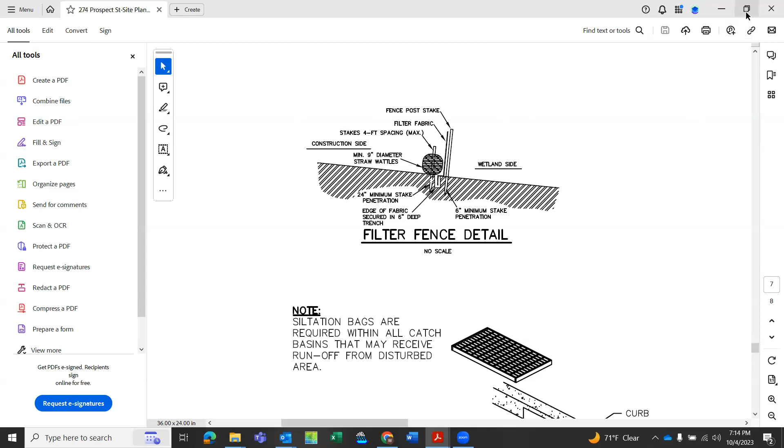Yeah, this property has had a number of proposals over probably the last 20 years or so. I know a couple of different landowners have cleared the property over the years. Some of them had maintained it as more of a field, so there aren't really too many mature trees on the property. It's more overgrowth and brush and so forth.

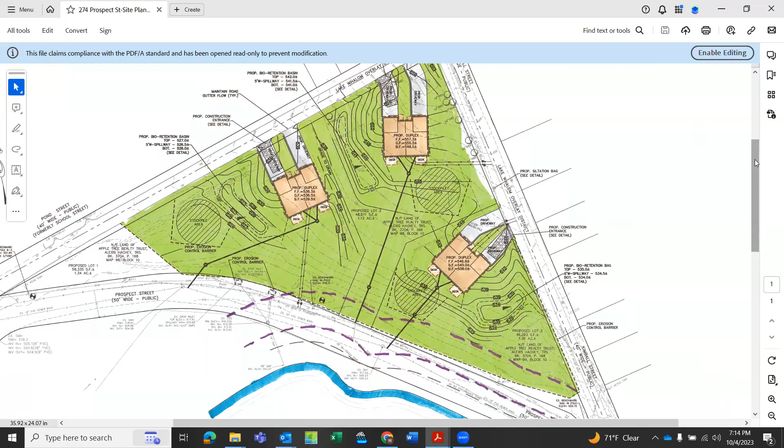And I did notice that there was a lot of Japanese knotweed, and I'm curious, certainly not part of the Wetland Protection Act, but is there a plan for that?

So we had this property looked at before for wetlands, in a couple of different iterations of projects we looked at doing on this property. We actually had an order of conditions issued by the previous Conservation Commission years ago in one of those iterations, and there were no wetlands on the property. I know that was a question even the planning board had, to make sure we were going in front of you to confirm nothing was on the property. That was something Anthony Cleves from our office, who did the plans, made sure the planning board knew on Monday when he met with them.

Yeah, that's cool, I don't think anybody's questioning that. At least I'm not, but my question was, I noticed there was a lot of Japanese knotweed on the property, and I was curious if you were going to address that, that's all.

You mean getting rid of all those? Yeah. I think the intent is to get rid of anything on there that's invasive. Because of some of the clearing that's happened before, they don't want some of the growth that's come in. So that's part of why what we're showing on the plan in light green is really what they're looking at as limited disturbance, to get rid of some of the growth that has come in that they don't want to remain on the property.

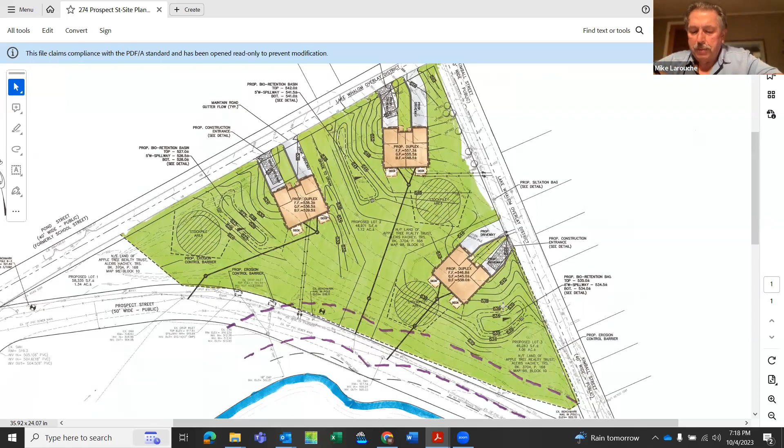Thank you so much. Any other questions from Mike? No, I think that's all I have. Thank you. Any other questions or comments from the commission?

Any questions or comments from members of the public? Okay, I think I'm looking for a motion to approve with a negative determination.

So moved by Jeff. Thank you, Jeff. Second, Mike. And I'm assuming that this is a motion for negative determination with standard order conditions - just to say it out loud.

Roll call vote: Rich Tremblay, aye. Jeff Viviano, aye. Mike LaRouche, aye. And I for myself - that is a negative determination with standard order conditions. Thank you very much.

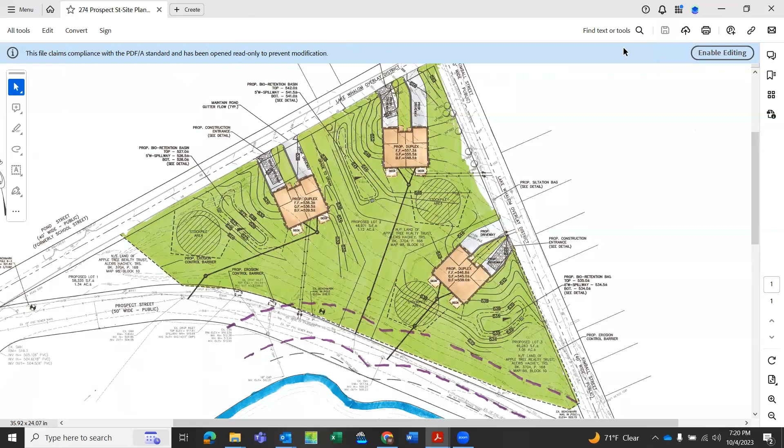Moving along, pursuant to Mass General Law Chapter 131, Section 40 as amended, and the Town of Lunenburg Wetlands Protection and Municipal Bylaws, a public hearing on a request for determination by Karina Veenstra for the placement of a 4x16 rolling dock at 19 Cliffview Terrace.

Do we have Karina or her representative here on the call tonight? I saw Karina on the call. Sorry, yes, I was trying to find the button to speak. I'm present, no issues. I live in Zoom, but I know it's not second nature to everybody.

Are you speaking for yourself, or do you have a representative that's going to speak? No, I'm speaking for myself. Okay, very good. So why don't you review the scope of the work with the commission? I live on Hickory Hills Lake on Cliffview Terrace, and we're looking to place a 4 by 16 rolling dock sticking out into the lake from our shoreline.

That is very kind of the scope of it. I have some photos, but I did not get them sent to our part-time person in time to get them uploaded to the site. Does anybody want to see those photos? I would need to get them uploaded real quickly. I'm happy to share them, it'll just be a pregnant pause.

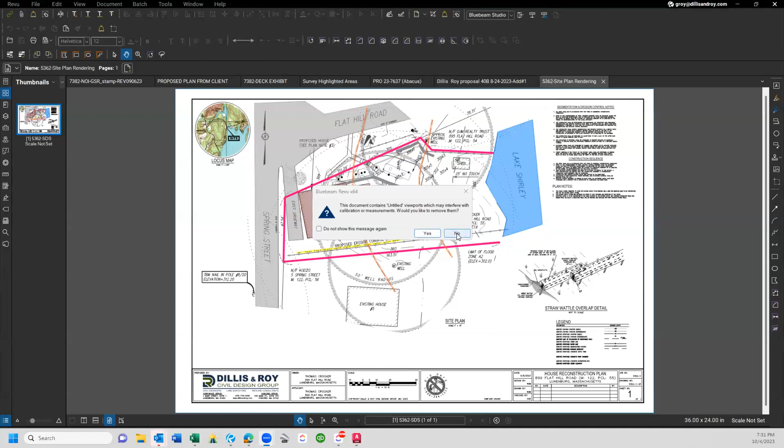As you can see, this is the intersection of Spring Street and Flat Hill Road. There's an existing 2-bedroom home here now that will be coming down, and any foundation walls found inadequate will be removed and replaced with concrete walls matching the existing ones.

There is no other site work being proposed. It's just a removal and replacement of this home, going up a second story. The new construction will rearrange rooms from a very cramped 2-bedroom kitchen and living room on one floor, spreading it out.

We'll put the bedrooms upstairs and expand the kitchen and living room area downstairs. At the bottom right of the screen, there's a straw wattle with overlaps proposed in yellow on the site, and two orange lines: the first is the 50-foot buffer, and the second, through the edge of the house, is the 100-foot buffer.

Other than that, there is no other regrading or anything that will happen—again, just a removal and replacement of what's there with a second story added. If Tom Crocker has any additions, I'll give him the floor if he'd like.

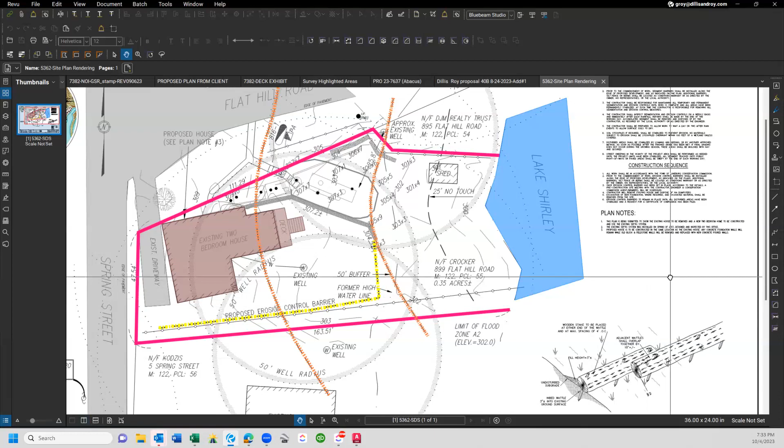Could we see plan note 3?

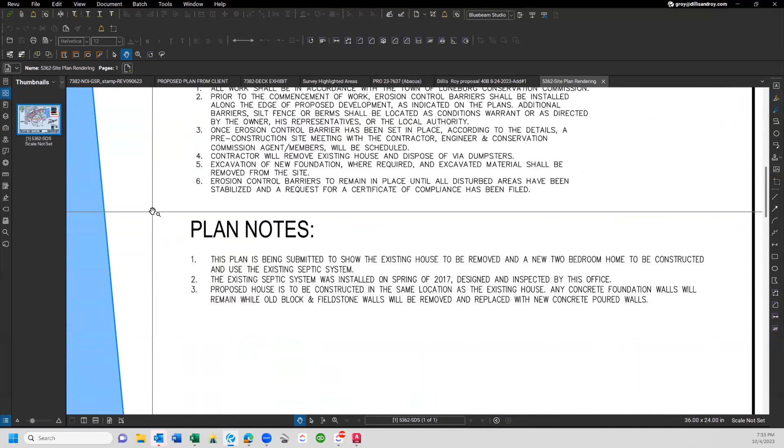I was just looking at the DEP comments, and I don't think they picked up that the footprint's not going to change on this, but the notes are there. I think it's just an artifact of them being rushed to do everything they're asked to do. Other than that one comment, the DEP had no other comments, and the file number is 208-1307 for this project.

I noticed the erosion control detail shows straw wattles with overlapped ends. I would expect to see straw wattles and a silt fence. If that can be part of the approval on your end, I don't think there'd be any issue on our end. Okay, thank you.

I did walk out there—there's a lot happening in a little lot, although it's not as small a lot as many in that area. But yeah, a lot happening, especially with those well keep-outs you have to manage.

I will open the floor to my fellow commissioners to ask questions or make comments. Well, I'm not seeing any comments—we have a quiet commission tonight, which is okay, nothing wrong with that.

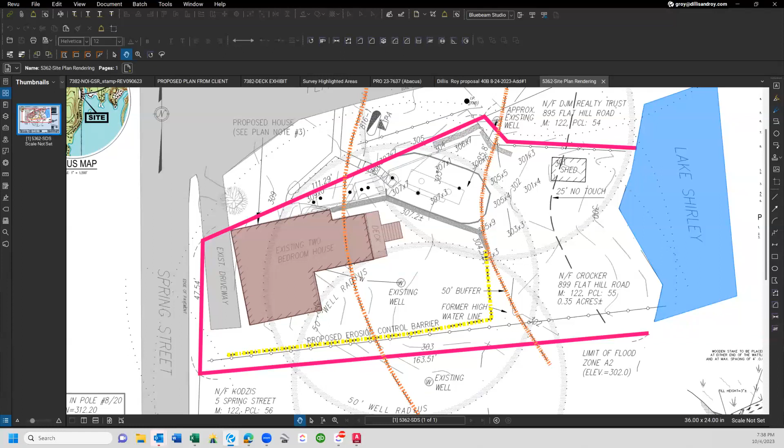Rich Tremblay, I vote aye. Jeff Viviano, aye. Mike LaRouche, aye. And I for myself. Okay, thank you very much. Thank you.

Okay. And for the record, I'm going to acknowledge that Rich Birch has now joined us. So we have the addition of Rich to our conservation ranks. Thank you, Rich.

Okay, we're going to start in on the continued public hearing section of our agenda. Pursuant to Mass General Law, Chapter 131, Section 40 as amended, and the Town of Lunenburg Wetlands Protection and Municipal Bylaws, a public hearing on a notice of intent by Peter and Lily Coronis for the demolition of an existing dwelling and detached garage and construction of a new single-family dwelling, driveway, and septic tank at 38 Oak Ridge Road.

Do we have the residents or their representative on the call? Yeah, Ryan Proctor with Dillis and Roy here. I believe Peter and Lily Coronis are on the call as well.

Okay, very good. Why don't you, Ryan, you've already taken us through the details of your project, but just give us the overview, if you would, show us the plans again, if you can, and then let's address where we left off at the last hearing. Okay, I will begin sharing my screen here.

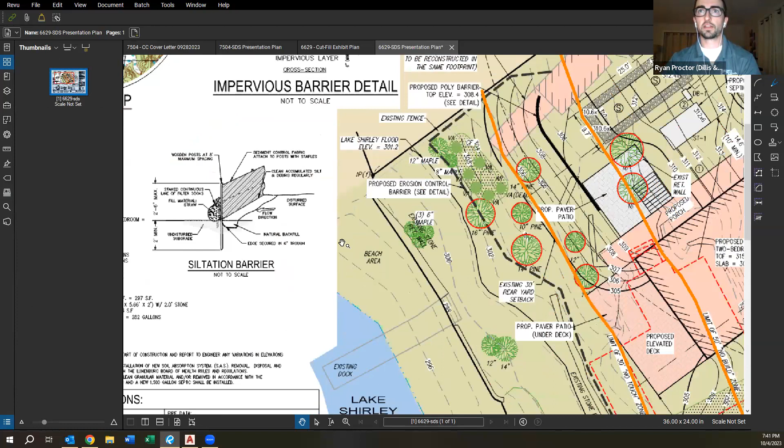So the first comments, these are from the commission members at the opening meeting. It was requested that we include a silt fence in addition to the straw wattle and show that detail on the plan. So I do have the detail included, which has a silt fence and the straw wattle supporting it. And that's indicated by this dark dashed line outside the limit of work.

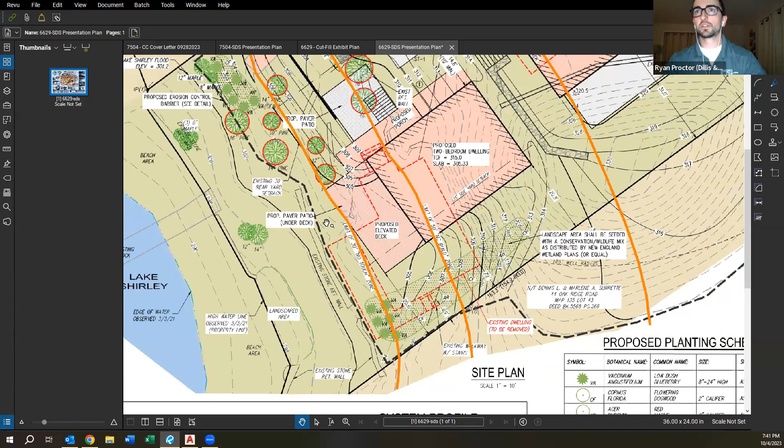It was requested that we clearly delineate the proposed trees that are to be removed, so I had circled those. The plan I submitted was not colored like this, but I did circle in red the proposed trees that are being removed as part of the project.

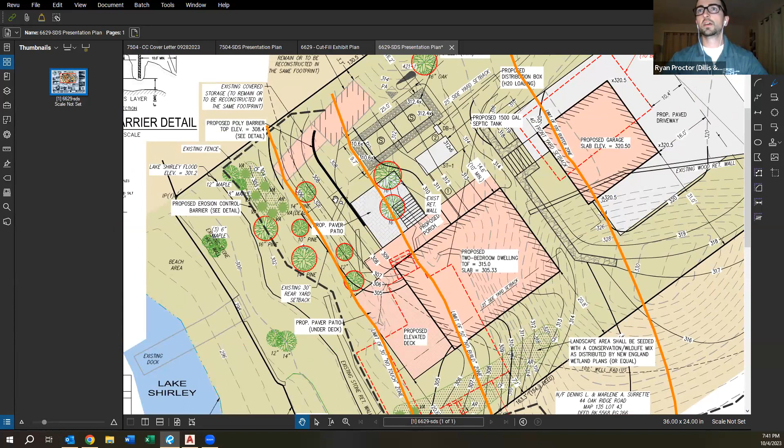One of the major, I'd say the most significant conversation at the previous meeting was relative to mitigation for that tree removal. So I did supply 2 areas and a table of the proposed mitigation. There are 2 areas that we thought would be suitable. One is below the existing sheds, where I'm circling with my cursor now. And then a larger area is in the location of where the existing house, which is going to be removed, within that footprint along this property line here, which is adjacent to the proposed house.

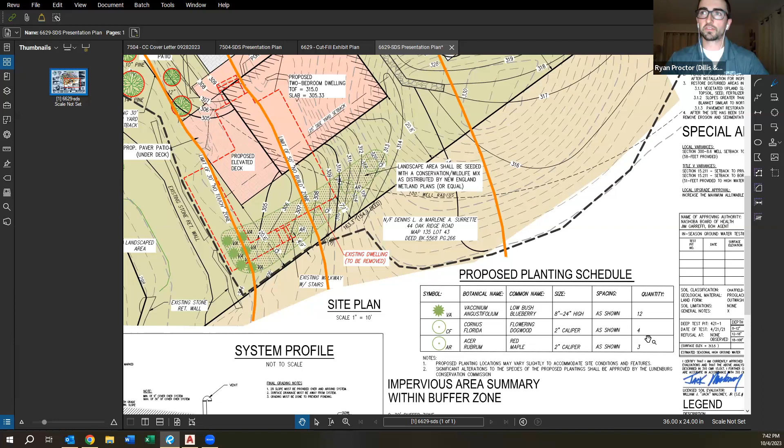So the trees that we're taking are primarily pine trees. So to provide mitigation for those trees, we have a mix of low bush blueberry. And then for shade trees, we have 4 dogwood trees and 3 red maples for those trees. And I did have a schedule here specifying size and the common name.

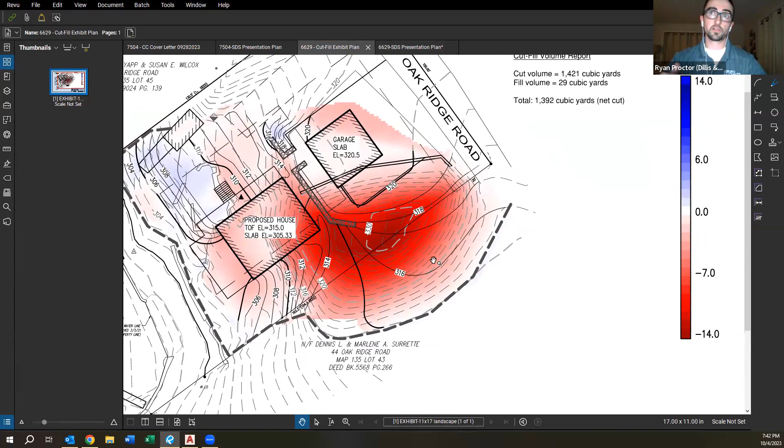The third item that was requested was a grading exhibit, so I did prepare a colored cut and fill plan. The reason for this request, we are proposing to take down a gravel esker that's mostly on our property, and there's some grading on the abutting property as well, which will come up in the next comment. The legend of the plan indicates that the darker red areas are the larger cut volumes. So this is that esker where we're going to be cutting it down to level off the area for the proposed house.

And for the driveway and the garage as well, the rest of the site is pretty mild in terms of cut and fill, indicated by the less intense red and blue colors.

The last item from the commission, requested by Leah at the opening meeting, was that we provide an updated WPA 3 form with the property owner's signature from 44 Oak Ridge Road. We do have a little bit of grading on the property associated with removal of that gravel for this project, so we did submit a revised WPA 3 form with the signature from the abutting property owner. DEP had a similar comment relative to obtaining that signature, so we did submit that, as I just mentioned.

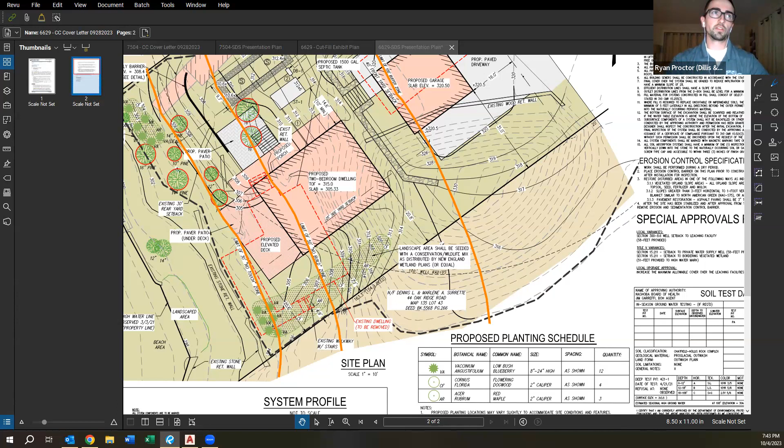Comment 2 was: given the steep slopes and the proximity to wetlands, the commission may want to require additional erosion control measures in stockpile management locations. I think the erosion control was addressed with the addition of the silt fence. For stockpile areas, it's anticipated that we're going to work our way from the bottom of the site out, so I have a note that stockpile materials should be stored outside of the 100-foot buffer zone where possible.

Lastly, from DEP, the commission may want the applicant to demonstrate how work this close to the resource area can be performed while providing protection to the resource area in perpetuity. During construction, we have the erosion control barriers, which will remain in place and be maintained throughout the construction process. We also have landscape mitigation areas for post-construction, and any disturbed areas not landscaped or occupied by new building area will be restored with 4 inches of loam and seed.

So that was it, those were the comments from the last meeting and from DEP. If there are any questions on that or any of the previous stuff I've presented, I'm happy to address those now.

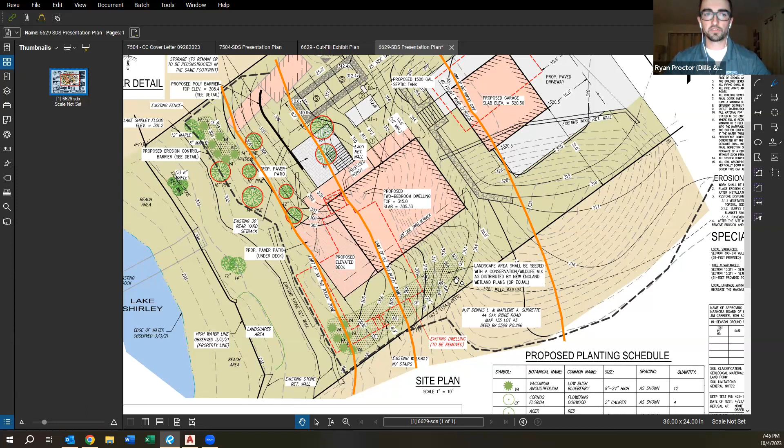Thank you, Ryan. So with regard to the stockpile location, you're not specifying them, but just adding a note that they're to be outside the 100 where possible. Yeah, exactly, it's a pretty small site, there's a lot going on here with the new building and septic. We're definitely not going to store anything within the 30-foot no-touch zone. Anything temporary may occur next to the building, but any large stockpile of material is going to be stockpiled on top of the site where it's flatter.

Okay, so I think what DEP was getting to is that where there are stockpile areas, they would want some additional silt control and protection there. If that's something, Madam Chair, that could be included as a condition of approval if the commission acts favorably, that's something we're willing to do. We're happy to do that.

Okay, and then so I saw your table. The trees that have red around them are the ones being removed, yeah? Yes. Okay, so how many trees are you removing? I believe there's 9 total, one of which is a pine tree that's dead.

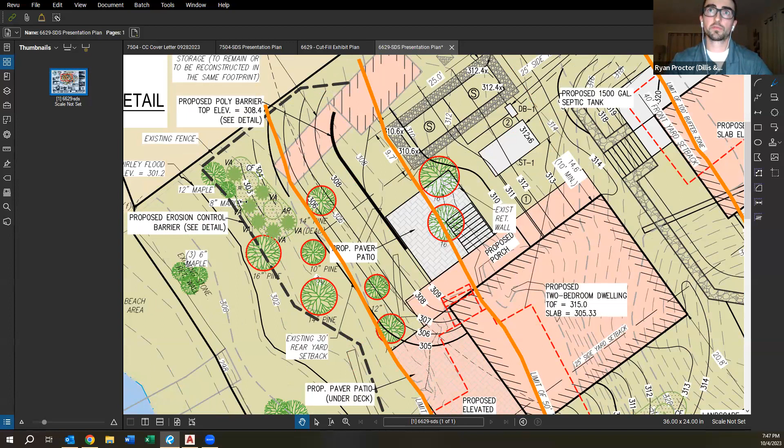And where are the new trees going to go? Yeah, sorry, they blend in a little bit. This is one of the landscape areas here, we have a dogwood and a red maple. And then we have 6 low bush blueberries in this area where there's some existing vegetation. In the location where we're taking out the existing house along the slope, we intend to restore that area with a row of blueberry bushes along the 30-foot, and up the side of the slope and along the property line, a mix of dogwoods and red maple. So they're drawn here in a circle.

So I'll just tell you, speaking for myself as one member of the commission, we do have a mandatory municipal guideline replacement of 2 to 1 for any trees taken out within the 30. I would expect those to be replaced within the 30, because that's where we get the highest level of protection moving forward. When you replace trees outside of the 30, outside of the 50, they're not as protected moving forward for any subsequent work. The intent of these regulations is to ensure, as DEP even says, in perpetuity, the protection of the wetland and the protection of these buffer zone trees. So again, that's me speaking as one member of the commission.

Other than that, I don't have any questions. I think that addressed all of my notes from what your actions were before. So I'll open the floor to other members of the commission.

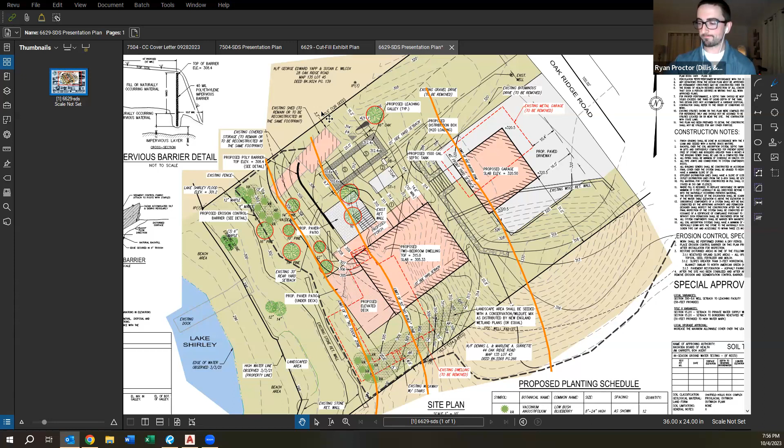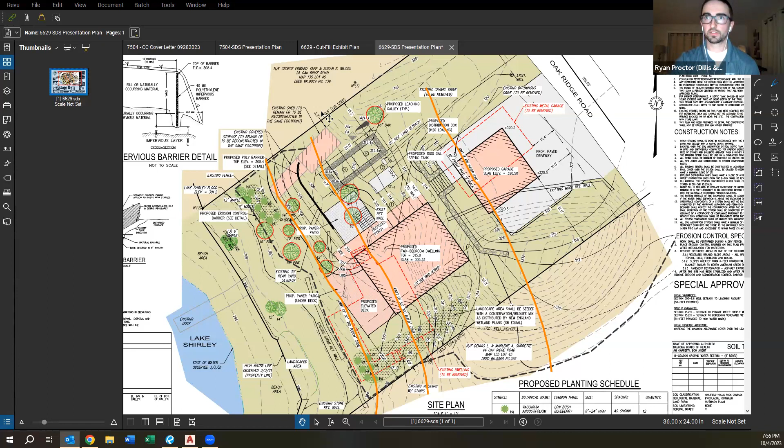So that means we get to ask you when you might like to have this hearing continued to. It sounds like the landscaping is really the only concern at this point, so if you can accommodate us at your next meeting, that'd be appreciated. I'm happy to get you a revised landscaping plan prior to, or sometime next week. That would be excellent, and October 18th is the date of the next meeting.

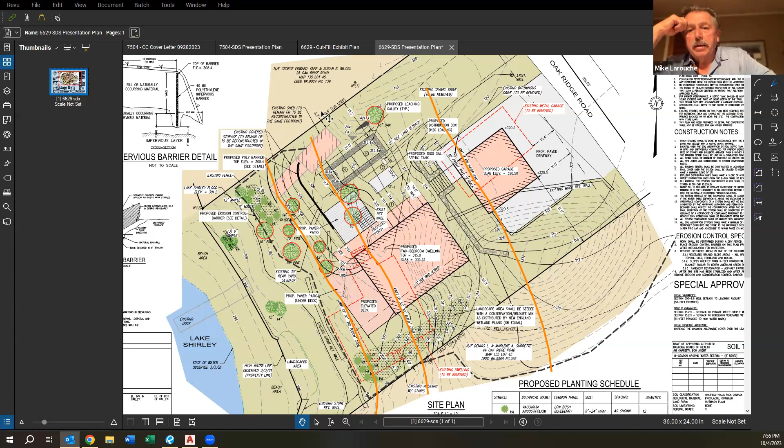I'm looking for a motion to continue this hearing to October 18th. So moved by Jeff, second by Mike. Okay, roll call vote. Rich Tremblay, aye. Rich Birch, aye. Jeff Viviano, aye. Michael Larouche, aye. And I for myself.

Thank you, Ryan. Thank you.

Okay, moving along. Pursuant to Mass General Law, Chapter 131, Section 40 as amended, and the Town of Lunenburg Wetlands Protection and Municipal Bylaws, a public hearing on a notice of intent by Denise Charpentier for the removal of an existing dwelling and construction of a single-family dwelling at 6 Peninsula Drive. Do we have Denise or her representatives here on the call tonight? Yep, Ryan Proctor, Dillis and Roy, once again representing the applicant. Welcome back, Denise Charpentier, and I believe her brother Tom is on this call as well with us, the abutting property owner. So I'll just jump right back in and share my screen for this one.

Excellent, thank you.

All right, so just a quick recap. This project is similar to the last, a tear down of the existing structure on the property and construction of a new single-family dwelling. This is at 6 Peninsula Drive, which is over on Hickory Hills Lake. Similar to the previous hearing, we had continued the opening public hearing. There were a couple of comments again from the commission, and we were waiting for a file number from DEP, which we have received at this point. And that is file number 208-1305.

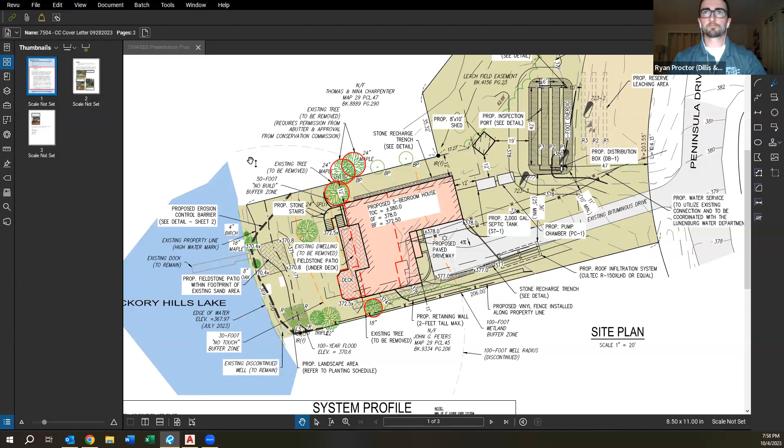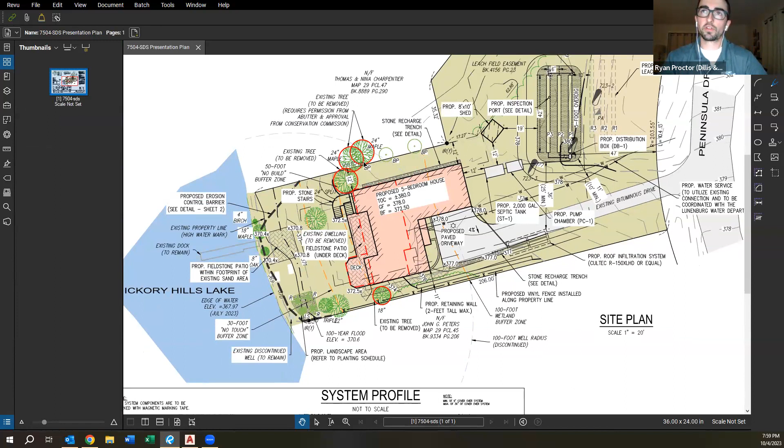So I will just once again go right down with the summary of changes I made to the site plan. Once again, the major topic of conversation at the first hearing was relative to which trees are coming down and any replacement of those. So I've once again circled the trees that are going to be removed in red. There are 4 trees coming down, 2 of which are on the abutting property, and they're all located outside of the 50-foot buffer zone, which is this orange dashed line here. For mitigation to these trees, I again submitted a proposed planting schedule.

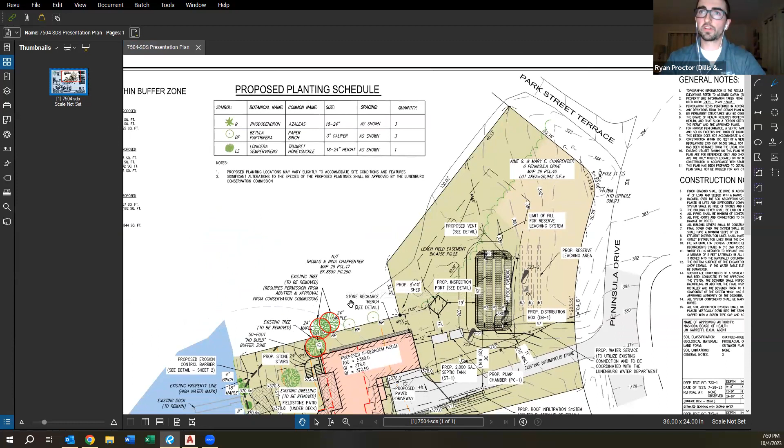For shade trees, we are proposing 3 paper birch trees along the property line, and I do have some pictures of this location I'll show a bit later on. Along the property line between Denise Charpentier and Tom Charpentier to the north, we're proposing 3 paper birch trees. We're also showing a landscape area within the 30-foot buffer zone, even though we're not removing any vegetation there, where we have 3 rhododendrons and a trumpet honeysuckle in this lower corner of the site. So that was the first comment.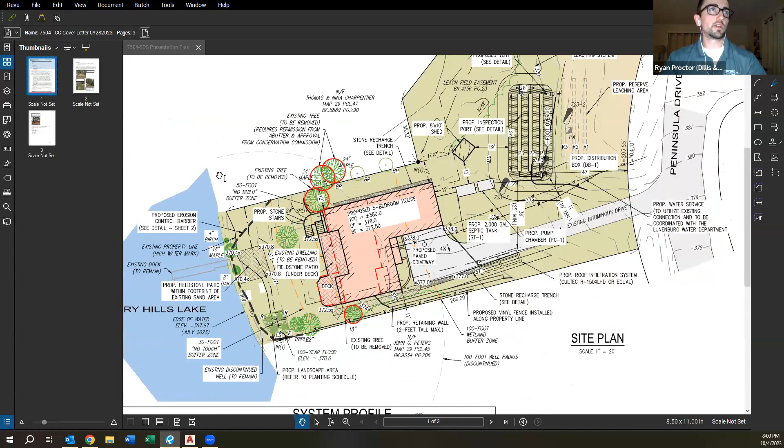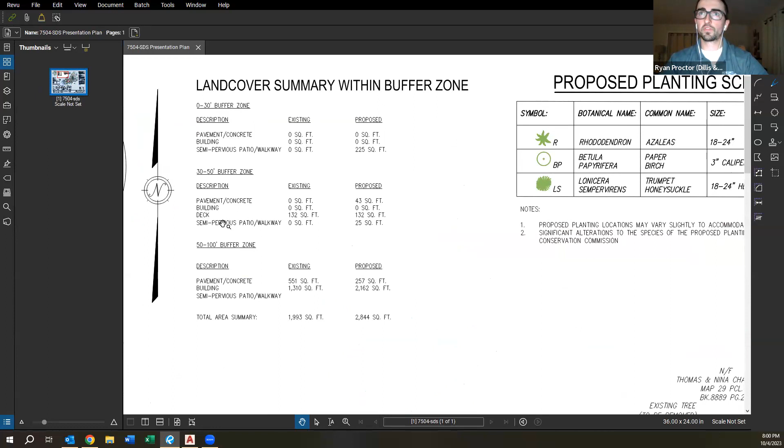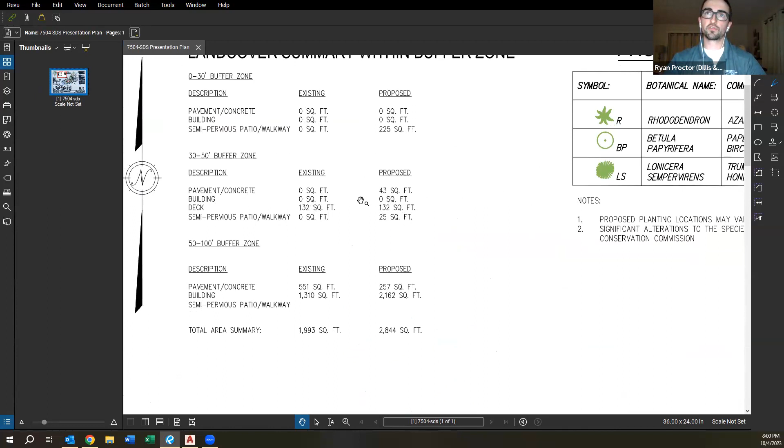The second comment, I think, was from Bob Pease, who is not here tonight, but he asked that I break out the proposed building and deck area from the 50-foot buffer zone, so I've done that. Basically what I was trying to document here is that there's 132 square feet of existing deck area within the 50-foot buffer, between the 30 and the 50-foot buffer zone, and that's what we're proposing as well. So we're not proposing to increase the building area within the 50.

So that was that comment. Again, we were asked to—it's not on this sheet, it's on the second sheet of the plan I submitted—but we were asked to include the silt fence in addition to the straw wattle that we'd previously proposed. The location is not changed.

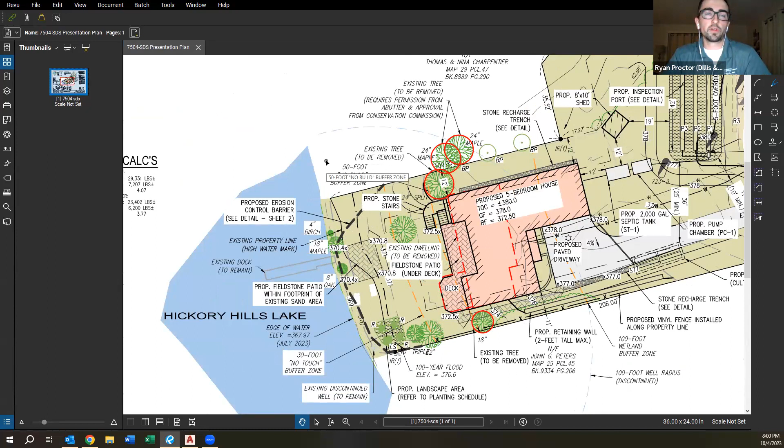It's still this dark dashed line down by the water, but we did beef up that detail as requested. Similar to the previous project, we were asked to obtain a signature from the abutting property owner, Tom Charpentier, for the 2 trees that we're taking down on his property that are just over the lot line. So I did submit a revised WPA 3 form with his signature, and included in the original notice of intent was a letter from Tom supporting this project. And the WPA 3 form was also updated.

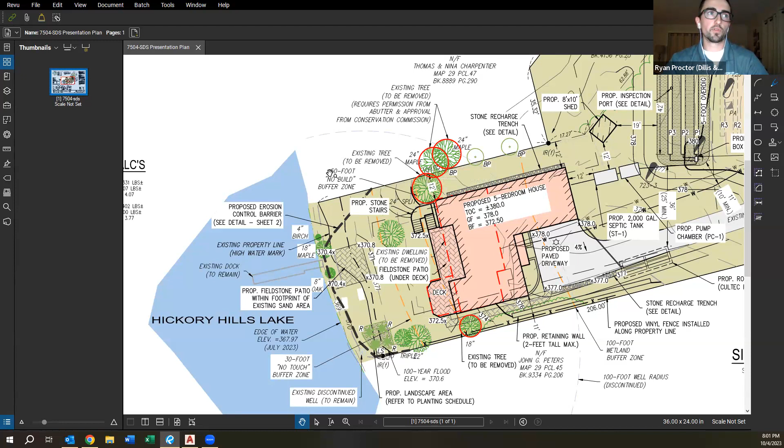This was a request from Leah to include the floodplain alteration. So we do have the sandbox that is down by the water right before the dock. I have some pictures of this I'll show in a moment. But we are working slightly within the floodplain. However, I did add some spot grades to document that we're not intending to change the existing grade out there, so we're not proposing any filling of the floodplain.

And then the last 2 comments were from Mass DEP, one of which I've already addressed—it was to supply the signature page on the WPA 3 form, so I've done that. The last comment was relative to the deed. The applicant's parents previously owned the property; they've since passed away. So Denise is working on obtaining a new deed for the property so she and her husband can take ownership of it.

So those were the comments. I'm going to pull some pictures over.

Okay, can everyone see these pictures here on the screen? Okay, thank you. So this is the sandbox area that we're proposing to replace within the footprint. We're proposing to do a fieldstone patio. The limit of the patio will be approximately where my cursor is here on this upper flat section. There's some concerns right now with the existing sand washing out along the slope, so we want to kind of define that area, and then within the footprint of this upper area, construct that fieldstone patio.

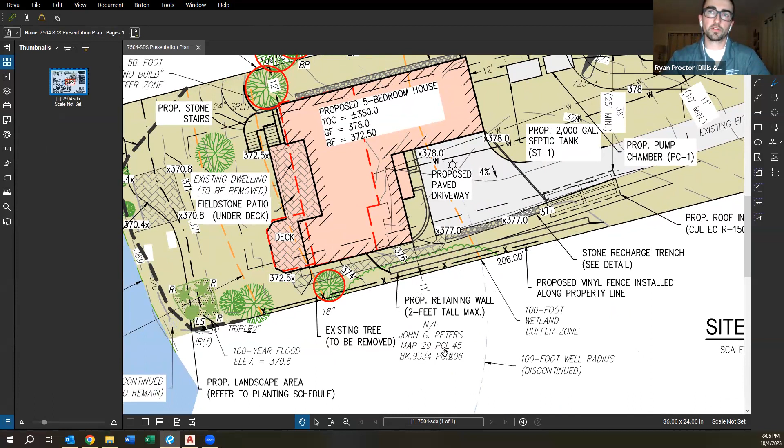The applicant is proposing to construct a privacy fence along the property line to the south. There is a row of vegetation adjacent to the one tree that we're removing that they do wish to take down as well. The intent of this landscape area is to mitigate for some of that removal along this property line for the construction of that fence. We did have a letter of support from Mr. Peters, the abutting property owner, supporting that portion of the project and the project in general.

So I'll leave it at that. I'm sorry for rambling on, but if there's any questions on any of the revised materials, I'm happy to answer that now.

Hi Ryan, thank you for that, thank you for adding that detail. I started out my engineering career as being a nervous presenter too, so I'm right there with you. All good things come with just doing it, right? Great, good on you for getting in there and doing it.

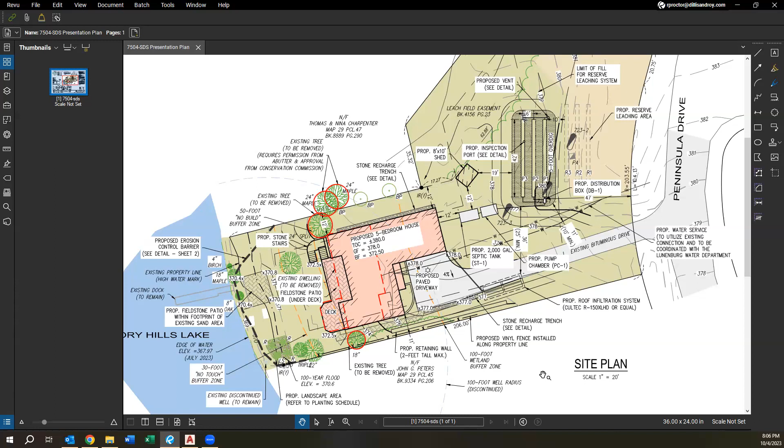So if you would, I would like to look at the table again of each of the zones and the amount of disturbance before and after. I do appreciate you taking on board the comments the commission has made there.

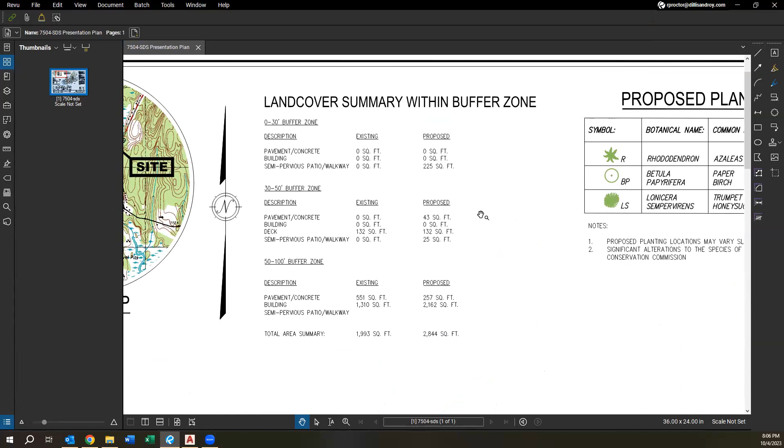Within the 30, the 225 square foot is that sand area that's going to now become patio area. That's correct. Okay, and in the drawing do you show the before and after, or just the after? That was something that wasn't 100% clear to me.

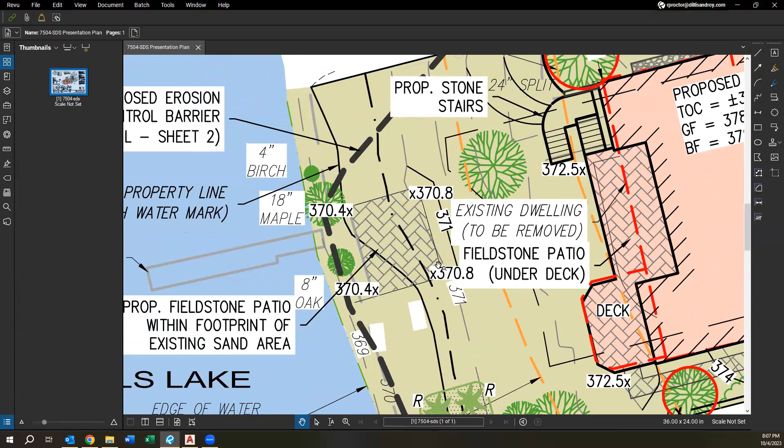Yeah, so it's a busy plan, I apologize. There's a solid line here - this is the limit of the existing timber that goes down. Then it's blocked by this spot grade that I added, but similarly it goes down to approximately that tree. We did pull that back. So we have this hatched area here, that's the 225 square foot, bound by the upper limits of the existing sandbox and where that timber is. The floodplain is this dashed dotted line here. Okay, and this is the property line, the solid line.

Didn't the property go to the lake? Oh no, it doesn't, because the Hickory Hills Lake Owners Association owns that. That's right, okay, got it.

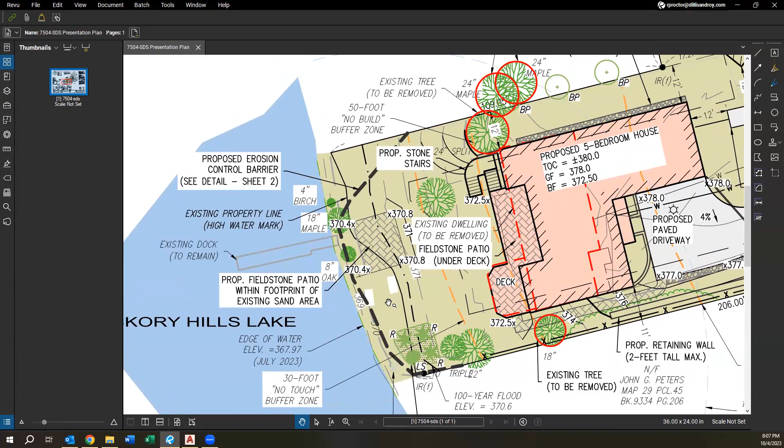All right, and then you're taking out 4 trees and replacing with how many trees? So we have 3 trees along the property line, and then four shrubs that we're adding within the 30. But all the trees we're taking down are outside of the 50-foot.

Okay, now I do appreciate that you're leaving a lot of trees there, but I want to say out loud too, because it's apparent when you walk the property - and maybe much less apparent for those commissioners that didn't have the opportunity of walking the property - when you're in the neighborhood and you go through, there is a lot of tree cover on the back end of this property, but a lot of that's going to have to come down because of the septic system outside of our jurisdictional area. I think, in the back of people's minds when they're making decisions about tree trade-offs, they think a lot about what's existing on the property and what is going to be touched. And so there's going to be a lot of tree work that has to be done on this property, unless you're going to tell me I'm wrong in that, Ryan.

I will not tell you that.

Okay, and so you're taking down maples and replacing with birch? Yep, there are some birch historically on the property, and we thought they'd do well in this environment, particularly in that location with the sun there.

All the birch on my property is dying. Oh, sorry to hear that. Well, it's one of the reasons why I actually bought this property 20 some odd years ago, is I liked all the birch on it.

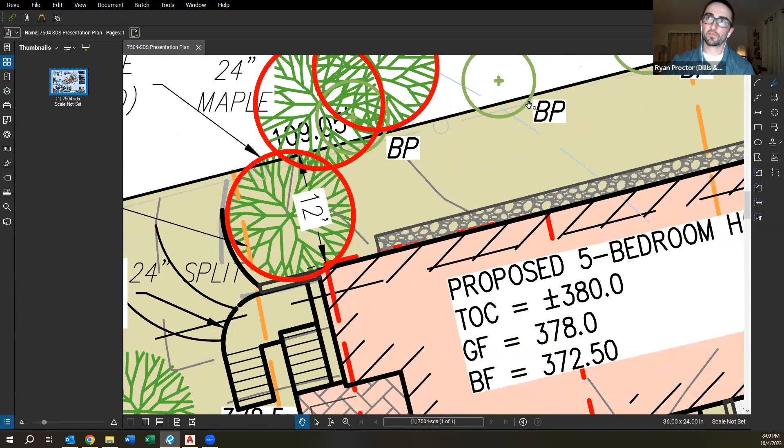Yeah, so the intent is to put them right on the property line. There is the fence - it's very faded and blending in here, but that's that wooden fence that I had depicted. The intent is to install them right on the property where possible. And Tom Charpentier is on this call, I'm sure he could speak to that if you'd like, but that is our plan.

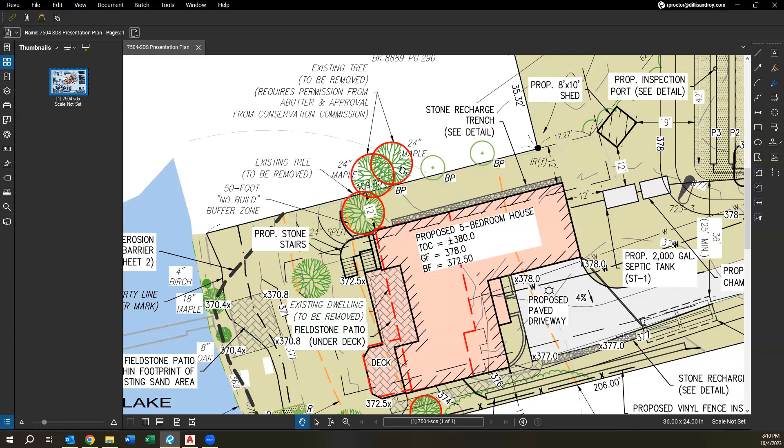Okay, where are the other two going? Yeah, so one is faded here, it's actually in the location, roughly, of the previous trees. And then we have a cluster of shrubs down by some existing shade trees by the water here - so we have 3 azaleas and then a trumpet honeysuckle down by the water.

Okay, so how does - I've heard that vegetation area is also compensating for the vegetation within the 100 along the lower fence as well? That's right, yeah.

So it looks like that vegetative area would compensate for one tree, right? Maybe robustly for one tree, but maybe not for one tree and what looks like maybe 50 feet of vegetation.

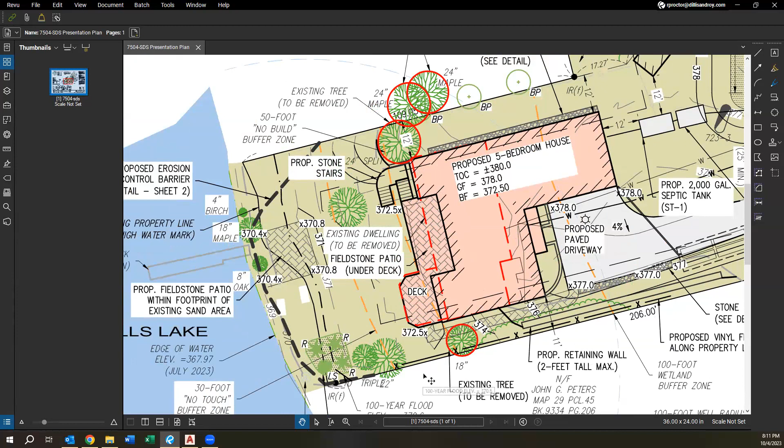Our thought on the shade trees, and I tried to show this in my pictures, there's quite a bit of overstory cover on the site already, so we didn't want to choke in the existing areas. I know some of it's cleared now for the lawn area, but our intent was to provide some low brush there. Especially in this portion of the site, it's a pretty crowded site, even with the existing house. So that was our thought there.

Okay, I will open the floor for fellow commissioners. Rich Tremblay, you have the floor. Thank you, Madam Chair. Ryan, those three trees we're talking about up there on that property line, can we go back to that picture for just a moment?

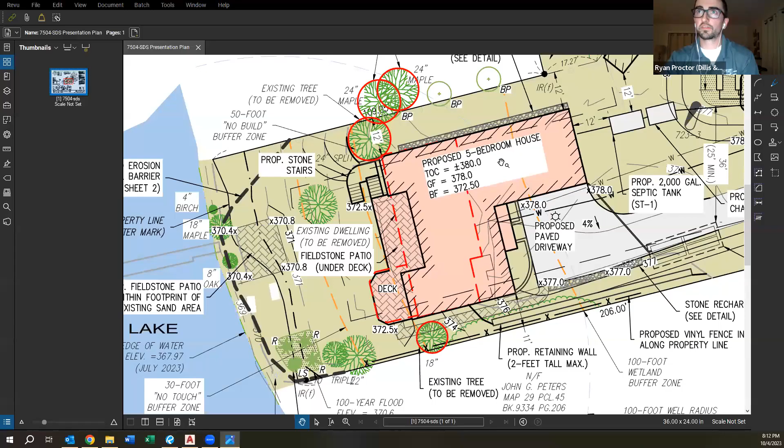Okay, I see. So the tree on the right-hand side, that's where the new house is going to be right next to, correct? That's right. Let me just pop right over here. So that tree on the right was this tree here, and this is the corner of the new house, within 10 feet of the existing house.

Then what's wrong with the other two that are on the neighbor's property? Tom had a limb fall on his roof, I forget what he said, somewhat recently. Similar to that, posing the risk of falling on the existing house, his house. He has a nice deck that comes out this way, and similarly there's potential for damaging the root system when we construct our dwelling.

Okay, thank you. All set, Madam Chair. Thank you, any other questions by members of the commission? Just going back and looking at my photos of the property as well.

Oh, okay, and I apologize, I have this on my phone, I don't really have a convenient way of sharing it. So that foliage on the bottom fence line, Ryan, looks like it's all hemlock trees or hemlock bush? That's right. Okay, so when you were describing it, I was kind of thinking of it as non-tree kind of stuff.

I've pulled up a picture of the area on my screen. Okay, and can we see your drawing again? You may. I see Jeff has raised his hand. Jeff, you have the floor.

Yes, Ryan, do you have any kind of information on the fieldstone patio and how that construction would be? So it's going to be level with the ground, open joint. The intent is to make it semi-pervious, we're not going to be using mortar. So least obstructive as possible, as pervious as we can, but it'll still be functioning. I can try to pull up some pictures if you'd like. But that's our intent.

Just my memory, I think we had a similar proposal on Reservoir Road, Lake Shirley. They were trying to put a patio in a sanded area down by a beach, and I don't think we said no, but they just removed it from the plan. But there was a little resistance with that. If I recall correctly, they had a sand area that they were going to loam and seed, and then, it was Matt Morrow, with a different location, but still within the buffer zone, a large patio area. Great memory, Jeff. So I guess, it's a concern for us, not necessarily me personally, but it was a concern in the past.

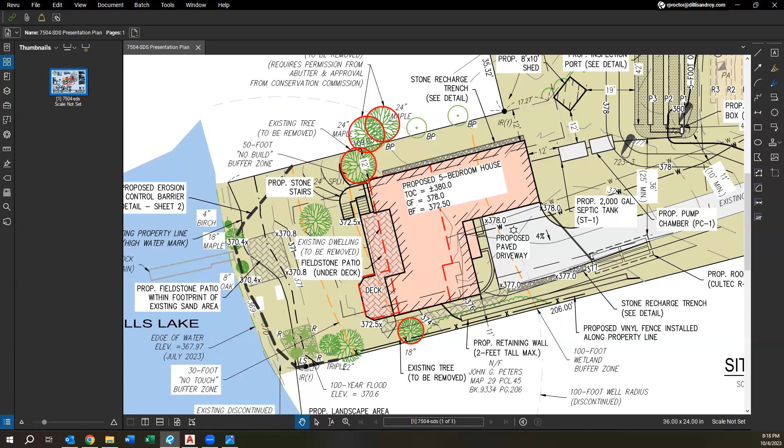Actually, while those guys are thinking, Ryan, takes me a while to soak on things, so I apologize for the back and forth. Can we go back up to your table of disturbance by each zone? We looked at the 30. I'd like to look at, so between the 30 and the 50, the pavement and concrete area that is added, that's the 43 feet.

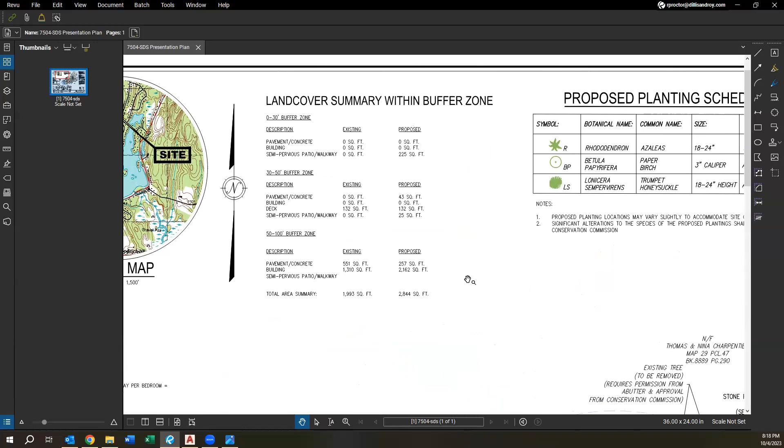What is that? So that is the stairs coming down from the deck, this portion of site stairs to get down from the upper level of the deck on the house. Okay, and then what was the last item in that table that was also additive disturbance in the 30 to 50?

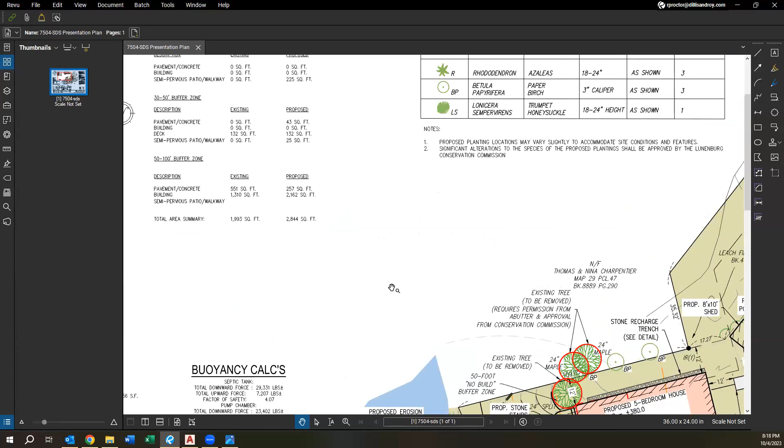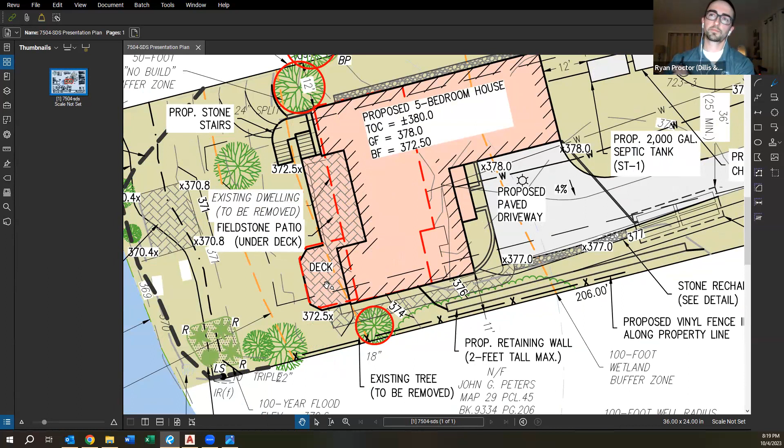Oh, I'm sorry. There is, on this side of the house, an existing traveled area. The owners intend to do, forgive me, I forgot to mention this, similar material to the fieldstone patio, a walkway down to this lower portion of the walkout area beneath the proposed deck. So that area is included in the table as well.

Okay. And let's go back up to the table. Yep, sorry.

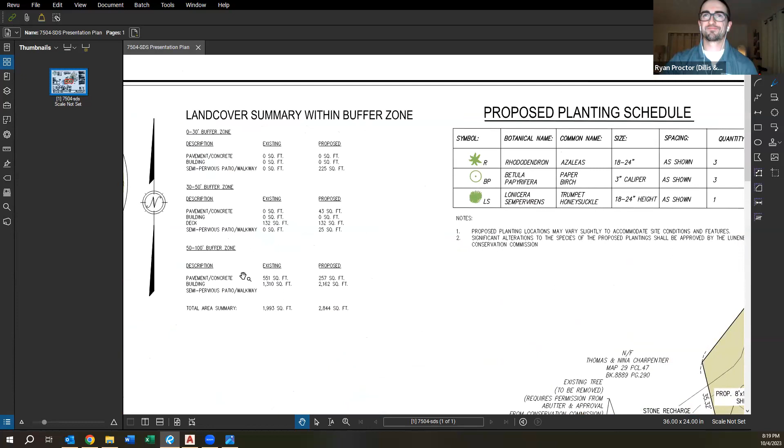Okay, and then the deck square footage is staying the same. Yes. So we're essentially adding roughly 70 square feet in the disturbance within the 50. Okay, I got it, that's right. Yep.

Okay, I personally would like to see 4 trees go away, 4 trees be added. That's me speaking as one member of the commission, and everybody knows I'm particular about trees and tree cover, but I'm only one vote on this. I do have a concern about adding the semi-pervious square footage in the 30-foot zone, but I understand it's in the interest of the wetland to stabilize that area and ensure we don't continue to have sand eroding into the area. So I think a semi-pervious patio, personally, is better than the existing sand area. I would like to see the area that's not going to have the patio, closer to the wetland, loamed and seeded to stabilize it. Again, that's just me talking as one member of the commission.

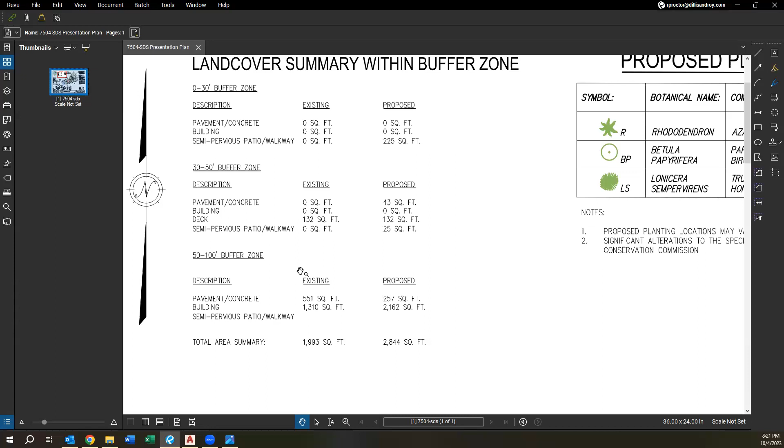Jeff, you have your hand up? Yes, it may have been covered already, but is any of this deck area going to be covered with a roof? I don't believe so.

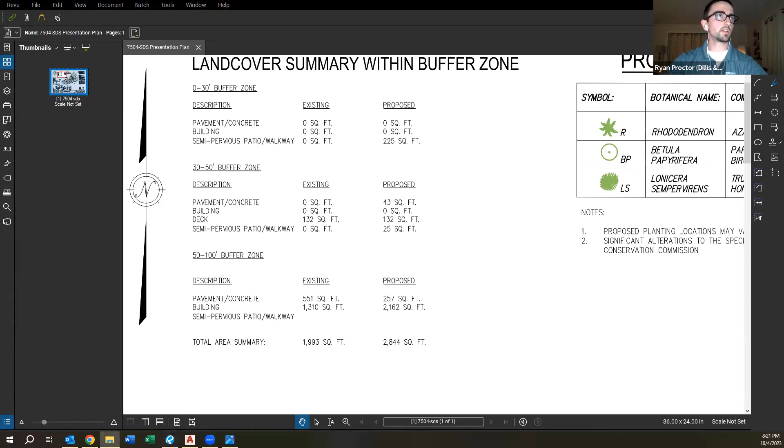Great question, I have some architecturals for that. Oh, here we go, no. I guess we will just not assume a deck isn't covered, but I guess it could be. Yeah, no, it will not be covered, it's open. Okay, I got you, okay. Yep, okay, thanks.

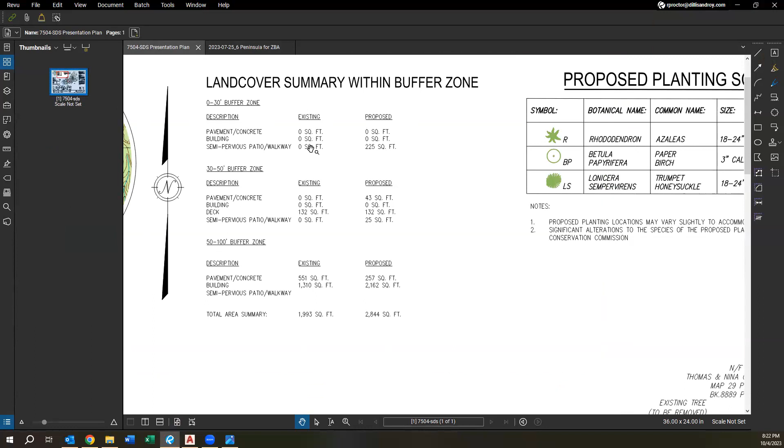Rich Birch, you have the floor. Oh, thank you, Madam Chair. Ryan, can we see a picture or two of the lake shore again? Yeah, let's see.

So I guess I would like to offer, perhaps on either side so you've got the 2 trees kind of as pillars to the walkway going down, can we put a little bit more low vegetation in there along the shoreline?

And just make sure that we regrade, or even put down a couple of the flagstones, because it looks like the sand runs down into the lake from there. If we can get just a little more vegetation in through there, I would be happy with that for some tree replacement. If we can get some of the shoreline revegetated a little bit denser, because there's no beach, there really isn't much reason for them to walk down over the armoring, but if we had some low bush blueberries, clethra, some other low facultative plants along there to add a little more habitat in amongst the armoring area.

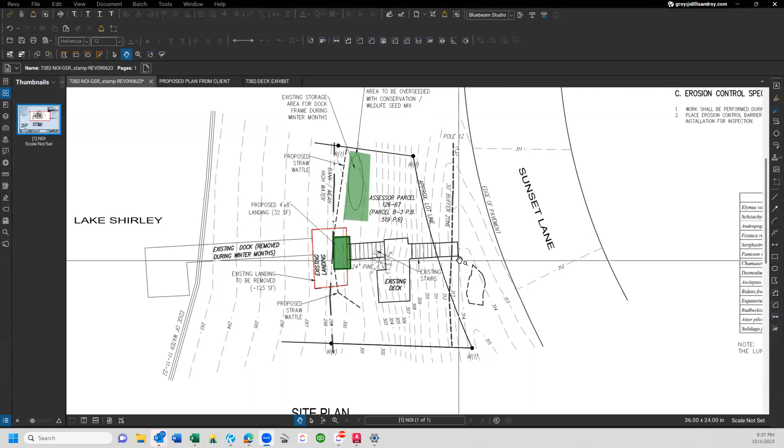All right, can everybody see the plan? Yes, thank you. Okay, so first off, Seth Donahoe from my office and myself seem to come and see you every other meeting, and I apologize for that. Wednesday nights are very busy nights, and Seth was triple booked tonight, so I told him I would cover Lunenburg on his behalf.

So I apologize to the commission that there's been a lot of back and forth on this, but Seth was here last, at least a month ago or so, and it was determined at the time that the proposed mitigation package we had been presenting to the commission did not seem to be looked on favorably, along with our previous proposal, which was to attempt to keep the existing lower landing in its place as it was constructed.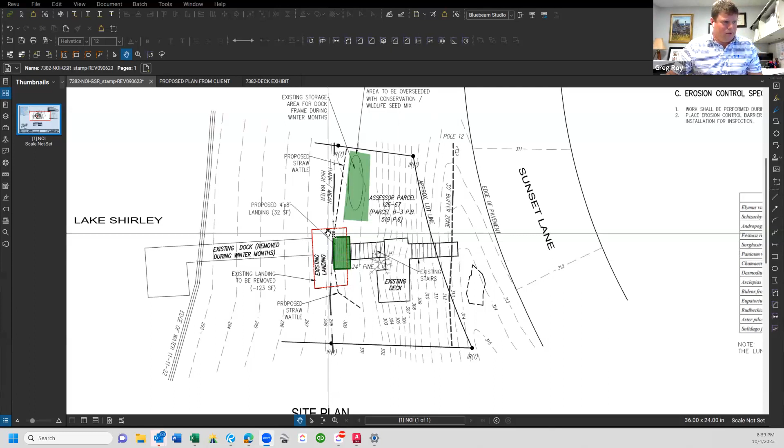So since that time, we've worked with the applicant, and we have a plan before you this evening that reduces the size of that lower landing from its current size, which I'm showing here in red is where it exists today, down to what we're proposing in green, which is 4 feet by 8 feet in width.

The originally approved configuration had that lower landing at 6 by 8, so we're actually reducing the lower landing to an amount less than what was previously approved. The reason we're doing that is so we can keep the total square footage of the deck area that exists today, and that will exist after this work is completed, to the square footage that was permitted by your commission originally.

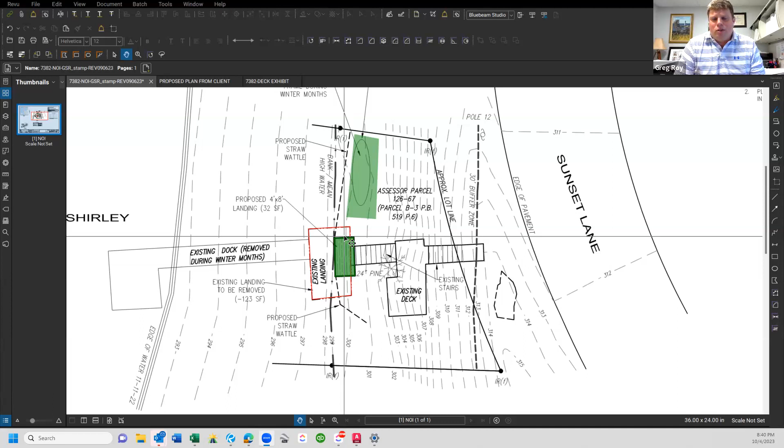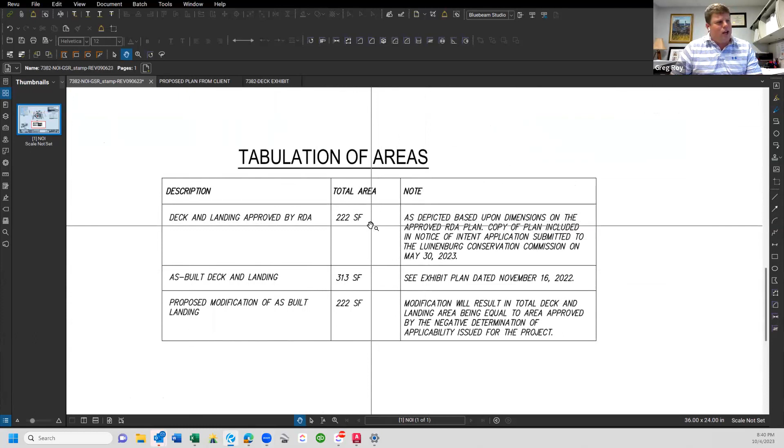So we have included a tabulation of the areas, giving you a summary of what was approved by the originally filed RDA, which was 222 square feet. We have the tabulation of the existing deck as it stands today, as located on the ground after it was constructed, which is 313 square feet. The proposed modification we're proposing this evening brings that down to 222 square feet, so that's what we're proposing to the commission.

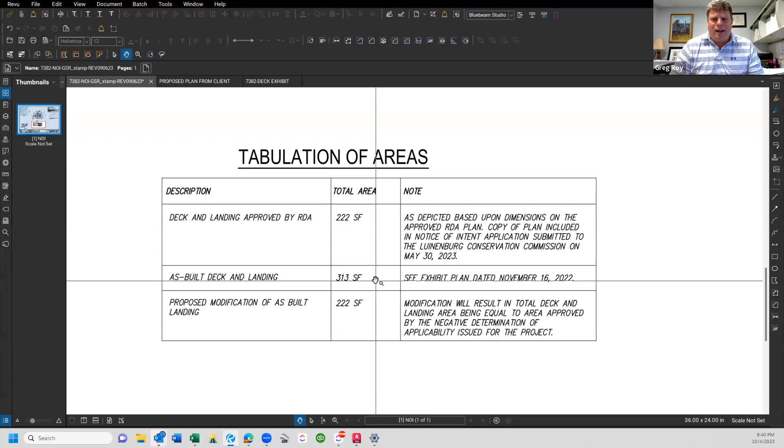We still have proposed an area where the temporary seasonal dock will be stored, over in this green shaded area. We are proposing an overseed of that area with a conservation wildlife mix, with the intention of vegetating that area with good growth during spring, summer, and early fall months. Then during the later fall, winter, and early spring months, outside the primary growing season for that wildflower mix, the area would be utilized for storage of the dock. So our intention was to be compatible with the proposed use of that area, but also provide some benefit and enhancement to the buffer zone in that location.

I think that's where I'll leave it. Happy to take any questions or comments from the commission.

Thank you, Greg. I appreciate you being here tonight on behalf of your colleague and helping us get some more movement on this project. I also appreciate your colleague taking on board the recommendations by conservation commissioners in the previous hearings. I don't have any further questions. What you've addressed are the concerns that I had noted in the previous hearing. So I'll open the floor to my fellow commissioners.

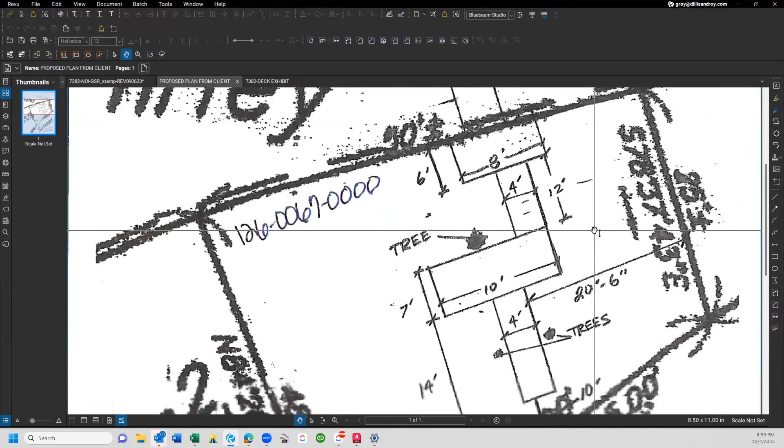Rich Bursch, you have the floor. Unfortunately, Greg, do you happen to have what was previously approved that we're going back to? Were sonotubes previously approved? Or was this design just sitting on the ground? We were told nothing into the ground. So nothing was put into the ground. Yeah, so that was the last commission's directive, nothing to be in the ground, where this is within the 30-foot no disturb zone. I myself would adhere to that, nothing in the ground.

And just for full disclosure, I was not in favor of this the last time it came up, so. Thank you, Rich. Jeff, you have your hand raised, you have the floor.

Yeah, I know one of the neighboring properties, I'm not sure if this is the current building inspector or previous, but it looks like they have little pads that you drive rebar into on angles, and that kind of meets their code to put a footing in. I don't think you're necessarily going to need sonotubes down there to hold a 4x8 deck. If you do it, it just seems kind of overkill to me.

But maybe I'm making a mountain out of a molehill. Why don't we just roll with the plan as previously allowed by the commission, with the blocks supported by the ground, not on a permanent foundation. And if we have an issue, then we'll have to address it. The existing deck right now just has 4x4s, and it looks like there's just a 10x10 cut-off square, a couple of them stacked crossed, and that's what the 4x4 is resting on. So nothing is in the ground currently.

Right, at least from what I remember in the pictures I'm looking at here. So yeah, there's no sonotubes right now, and I just can't see sonotubes being required for a 4x8 deck, but I guess you never really know with the building inspector. It just happened to pop into my head. Maybe I should have just, yeah, we're at the commission's pleasure. It is in your purview, so I was just trying to avoid a potential issue.

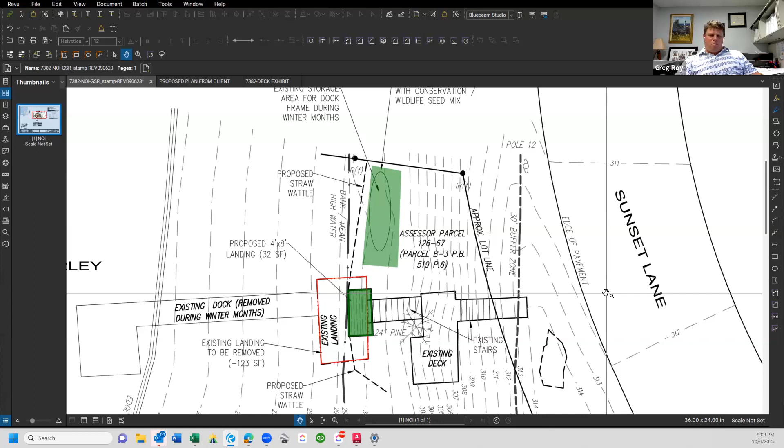Madam Chair, yes Greg. I'm sorry to interrupt. I wondered if I could borrow 60 seconds of the commission's time to give you an update on an enforcement item that you have later on in your agenda. Yeah, that would be great, I will allow that. Please, thank you, proceed.

I just wanted to inform the commission that the owners of 39 Island Road, which is on your agenda under enforcement issues, have retained our firm to file a notice of intent for the construction of the proposed wall. We actually have filed the notice of intent already. We filed that on Monday with the hope that we could get on your next agenda on the 18th. We did not receive any confirmation on that, though. So I'm still not certain when that'll be on your agenda, but I wanted to let you know that I'm here on behalf of them, DJ and Krista Palma, the owners of 39 Island Road.

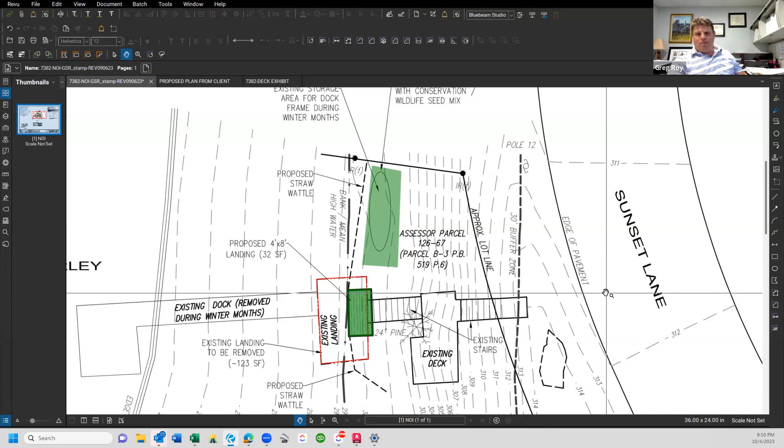Just to give you that update that the owners wish to be responsive. They contacted my office within 24 hours after being contacted by the Conservation Commission, and we shifted things around to get a notice of intent to your commission in the most expeditious way possible. So I just wanted you to know that they are being responsive to the enforcement that your commission raised to their attention. Thank you.

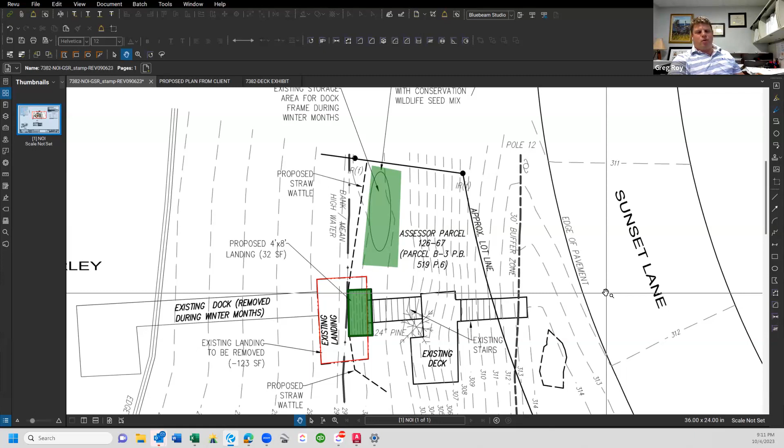Thank you, Greg, that's all. Yeah, I appreciate that. And I do see that NOI logged at the DEP page as well online. So thank you. You're welcome. That's all, I just wanted to give you that update. Very good, thank you very much.

So moving along to the business section. Generally we do new business. Does anybody have any topics that were unknown within 48 hours of the meeting? I don't hear anything. We won't get an update on the timber right funds.

One of the things I wanted to ask the commissioners is about agenda formats. My observation is that generally when we get to the business section, we reorder things to allow the enforcements and certificates of compliance to be done first. So I wondered if there's any reason we couldn't just make that the standard order of the agenda.

I'll call Rich Birch out first, because I think he knows a lot more about the protocols and where we have latitude and where we don't. Is there anything that would keep us from doing that, Rich? Actually, Madam Chair, the agenda is at the discretion of the chair. You can toss it up however you would like to do it.